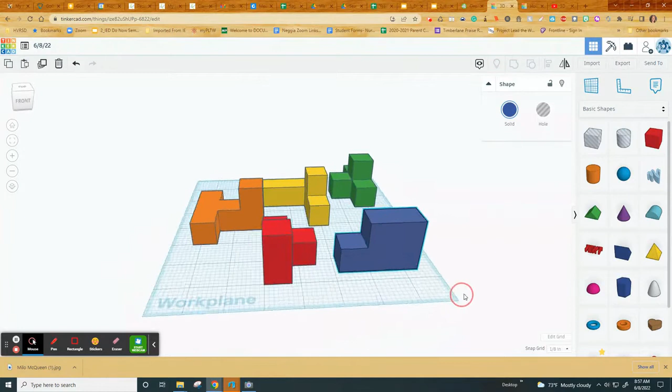Okay, so today you're going to create your puzzle pieces in Tinkercad. Here's an example of a Tinkercad file that I created that has all the pieces. We'll talk about how you're going to turn these in just a moment.

So let's take a look at the puzzle cube. Okay, so here's the puzzle cube and here are the pieces. Okay, this is the yellow piece.

Okay, this is the red piece. This is the green piece. This is the orange piece, and this is the blue piece. Okay, and they can be put back together, but we won't take the time to do that right now.

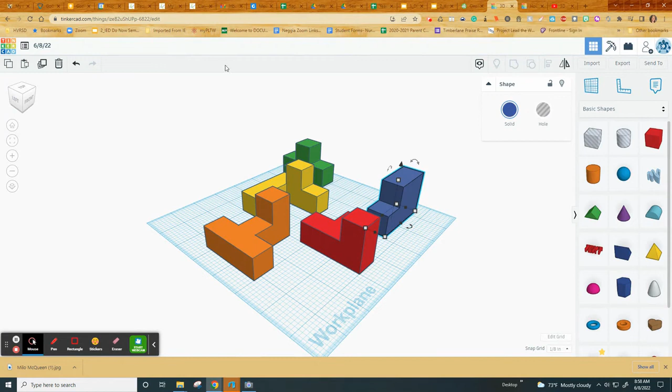Okay, so going into Tinkercad, we're going to start a new file. To do that, I'm going to click on Create New Design. And I get a work plane that pops up.

Okay, so the first thing we're going to do is we are going to edit our grid because we default to millimeters. We're going to move to inches. Okay, and we're going to leave it at 1/8 of an inch for the snap grid. And the snap grid means when you hit the arrow key, it snaps 1/8 of an inch in whatever direction you are arrowing.

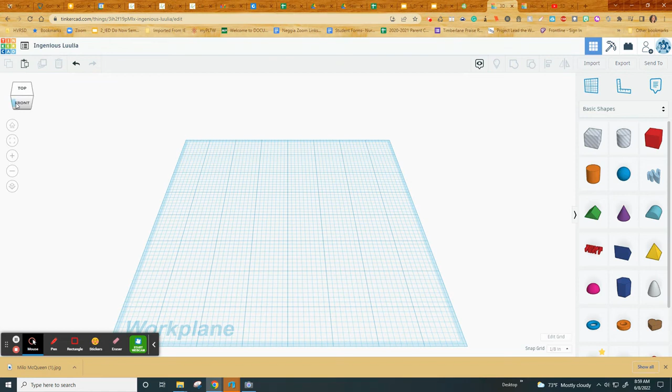Okay, we're also going to make use of the view cube up here, where you can turn things and look at things flat on. If I want to look at it from the front, or I can kind of tilt it and look at it from an isometric view.

I'm going to start by dragging out a cube. And when I click on this little handle, it tells me it's 1 inch. But that's not the correct size because I know that my cubes are 3/4 of an inch.

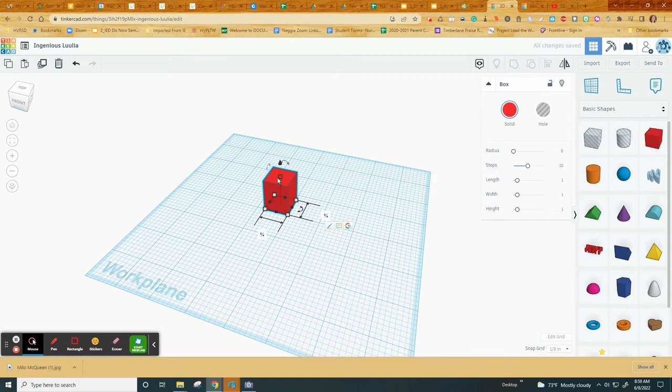So I'm going to change that to 0.75, that to 0.75. So I've got my width and my depth at 0.75. I'm going to click on this little white dot here to change my height to 0.75. Now I've got a cube of the right size.

So I'm going to click on it and I'm going to select it and do a Control C so that I can now use that exactly sized cube that I want.

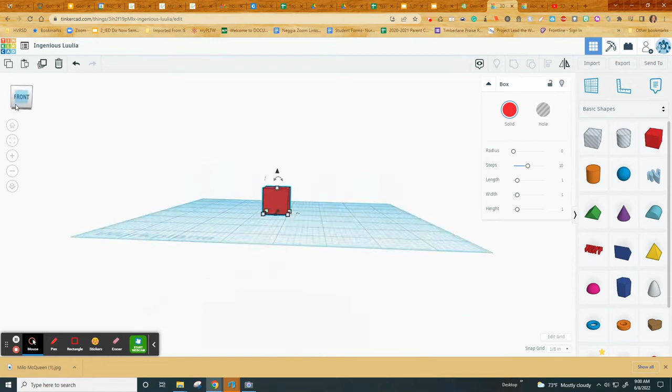Okay, so I'm going to switch to the front view. I did a Control C and I'm going to zoom in a little bit and I'm going to do a Control V. Here's my new cube. I'm going to click over until it's exactly even. If I go a little bit further, it is 1/8 of an inch off, so I'm going to left arrow back. Okay, and now I have 2 cubes.

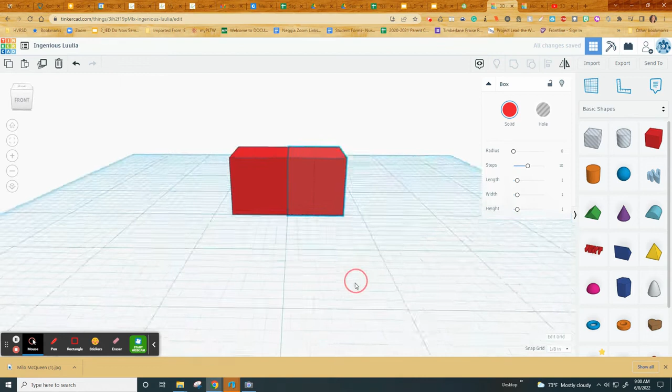The piece that I'm going to make is going to be, it looks like a T with a piece sticking up. So I'm going to paste again and arrow over. Okay, this time I want this to come out in this direction.

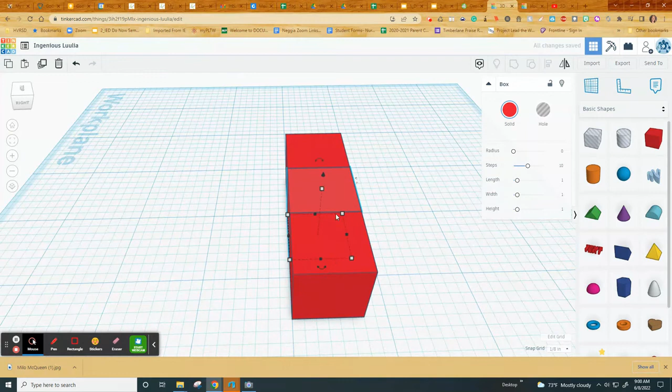So I'm going to select that cube and Control C and Control V it. Okay, I'm going to line it up perfectly this way, and then I'm going to rotate my view in this direction. And I'm going to use my left arrow to move it out.

Okay, the last thing I need to do for this piece is I need to have a cube on top. So I'm going to take this cube again. I'm going to Control C, Control V it.

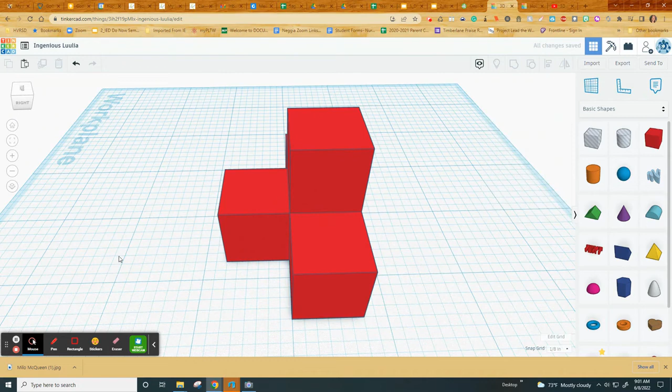I'm going to arrow it so it lines up, and this time I need to raise it. So to raise it, I'm going to use this little black cone. Just going to drag it up a little, and then down here is how high I've dragged it up. Instead of dragging it up 1/4 of an inch, I want to drag it up 3/4 of an inch, so 0.75. And now I have the piece that I have called my green piece.

So I'm going to click and drag around it, and I'm going to group all the parts of it. So now it is one piece. When I move it, the whole thing moves. I'm also going to change the color, and I'm going to call it green.

And I'm going to come up here, and I'm going to call this Puzzle Cube Green.

Okay, at this point I have my first piece, and I'm going to continue to do this with my other pieces. Actually, I'm thinking maybe we should create all of the parts in one file. So I'm going to rename this.

I might edit out this section, guys. All right, so let's keep it.

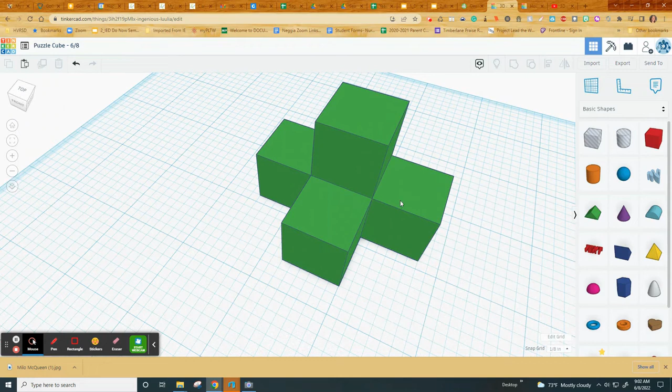We'll call it Puzzle Cube, and I'm going to use today's date. Now I'm going to take that whole piece and move it out of the way. I'll build my next piece by doing a Control V, and here's my cube again. Just checking the sizes - it's 3/4 of an inch, 3/4 of an inch, and 3/4 of an inch tall. Then I would create a second piece, and I'm going to continue until I have all 5 of my puzzle pieces created.

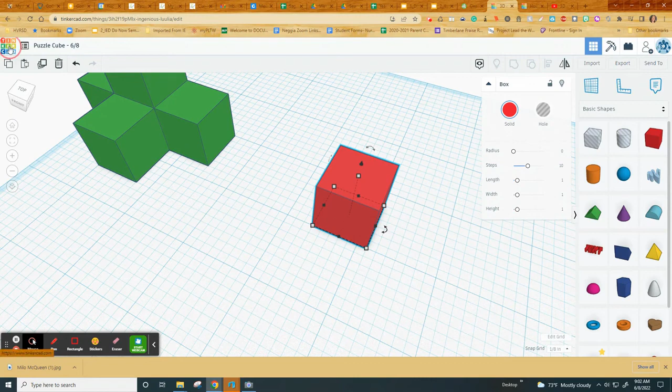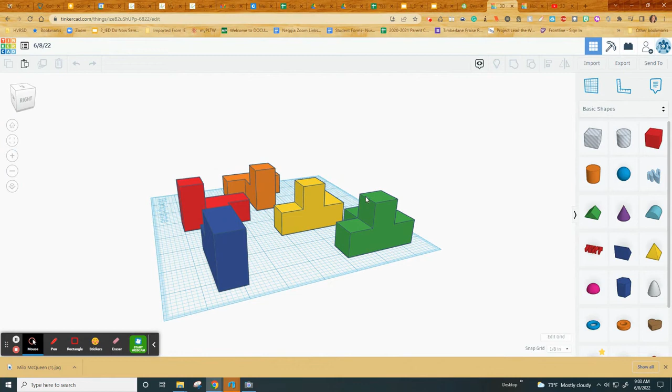Coming back out to Tinkercad, when I finish, my file will look something like this. Now, depending on how you built your pieces, you might need to rotate them for printing. You always want to make sure you have a flat bottom without anything hanging over - you don't want anything levitating in the air.

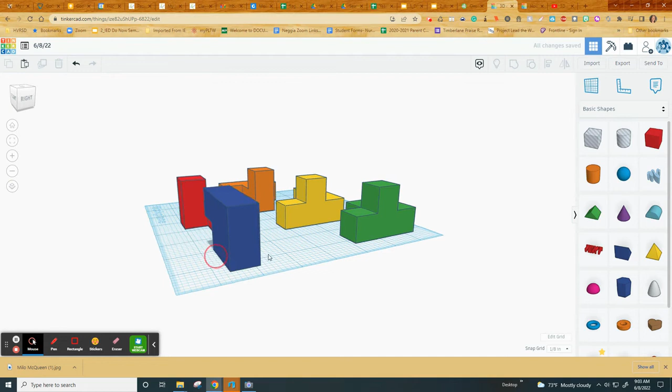So if for some reason I created this piece in such a way, let's just position it upside down, you wouldn't turn it this way. You're going to think about the optimal way to place each piece. Probably the best way to place this piece would be to lay it flat on the ground like this.

So I'm rotating - I'm clicking here, grabbing that arrow, and I'm going to drag. I can also type in the number, so I'll say 90 degrees. And if it's levitating, which this is, I'm going to need to grab that black cone and put it down at 0.

Okay, when the time comes, here's how you're going to do this. I'm going to rename this puzzle cube. You're going to rename it and put your name in it, along with your period. So let's say I'm in period 9A - I'll put 9A and then my last name.

Let's get rid of the date here. So I'll call it puzzle cube dash 9A for period dash last name.

And then what you're going to do is select a piece one at a time for exporting. You're going to click here and rename this, because this piece is the blue piece, so you'll add 'blue' to it. Make sure it's clicked on, then hit export. When you hit export, you're going to say just the selected shape, not everything in the design. Choose STL and it will download to your downloads folder.

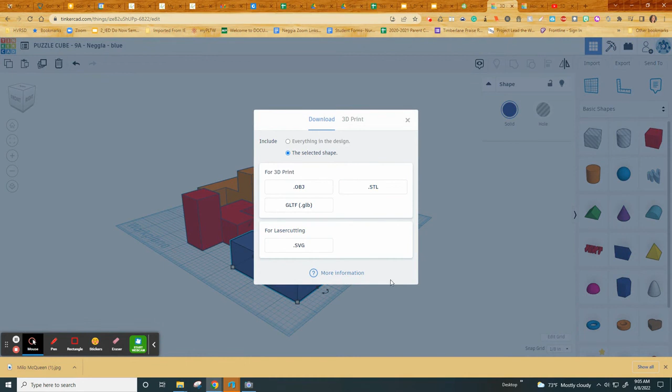You're going to do the same thing for the next piece - this is your red piece. You're going to come in, rename this 'red', make sure it's selected, export, and export it as an STL, the selected shape only. Once you have everything exported, you're going to go into OnCourse.

In OnCourse, you can upload or attach all of your STL files and turn them in.